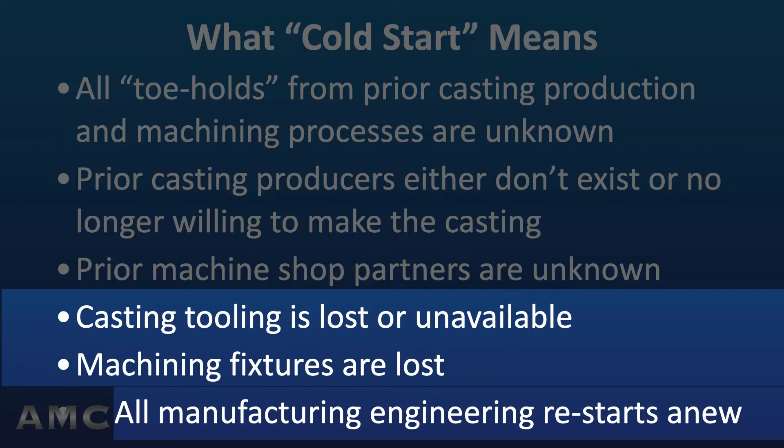To address this steep challenge, our 2022 webinar series is focused on initial thoughtful manufacturing planning before any tooling is designed or manufacturing processes are chosen. This initial thoughtful planning is called project management. The essence of project management is to clearly identify all that is required in the finished casting, understand it, and put all the major steps in a timeline. The idea is to think of everything that matters in advance and not miss anything. The objective is to not back up to fix or redo anything. For complex, high-specification DLA legacy castings, not missing anything and not backing up to redo anything is a tough challenge.

In part one of our four-part webinar series, we addressed a machine shop awardee's logical first question: can we machine this geometry complete from a wrought bar or block of an equivalent alloy, rather than procure a casting and machine a few of the casting's features to net shape?

In part two, we acknowledged that a machine casting is required, and we addressed the project management issues of planning for a casting made in the air-set sand process. For DLA legacy castings, the air-set sand and investment casting processes are the most capable methods to produce the castings. Sometimes either process can be chosen; other times, one is preferable or even required over the other. The reasons for the air-set sand process choice were addressed in part two.

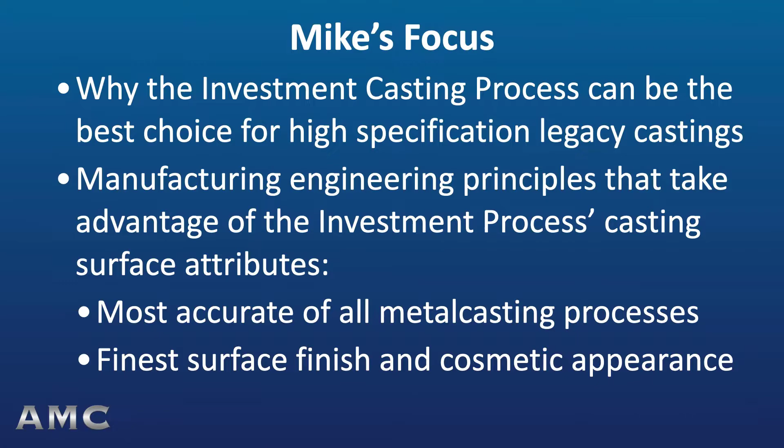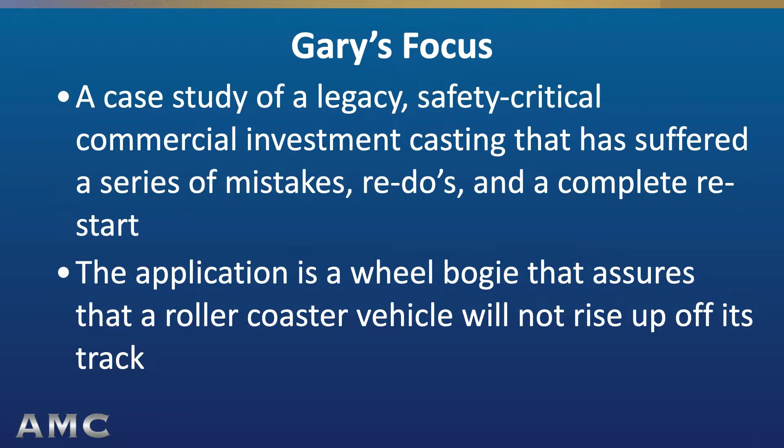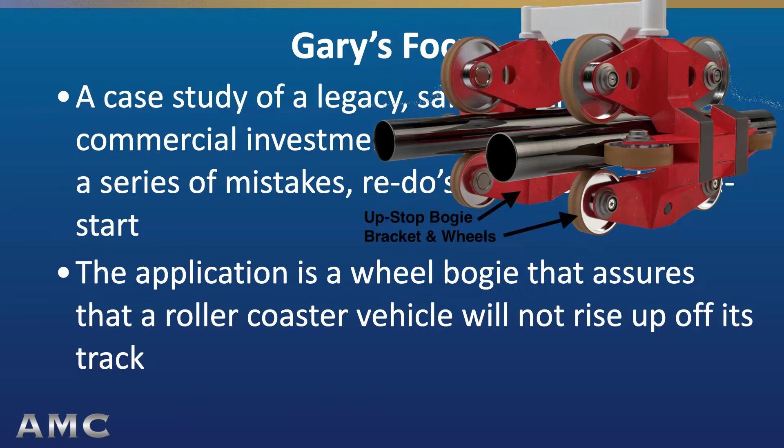Following Mike will be Gary Burrow, our Cast It expert in mold cavity design, which includes tooling design and construction. Gary is also our expert in additive manufacturing alternatives to traditional casting tooling. Gary will use his expertise in both arenas to explain a case study: a high-specification, safety-critical legacy investment casting used as a replacement part in an amusement park roller coaster vehicle. This 10-piece order for a 1970s-era replacement casting has suffered a series of non-conformances and restarts that are typical when a complex casting manufacturing project starts without project management forethought.

But first, here's Mike with a summary of the indications for and capabilities of the investment casting process. The investment casting process is one of the oldest, if not the oldest, of all metal casting processes. Yet it probably is the least understood by casual designers and users of castings.

Let's take a moment to define a couple simple yet interesting facts about the investment casting process. Historically, it was called the lost wax process, which is really a more descriptive name. From its historical beginnings, artisans would carve blocks of wax into shapes that became the pattern for a casting mold.

The mold was made of clay, the type that can be heated to make pottery. When the shell of clay around the wax was heated, the wax melted out or was lost. The earliest lost wax castings were poured in gold and silver. Later, copper was used, which is like gold and silver in that it's naturally occurring as a metal.

Back then, and continuing today, artisans carve wax to make bronze statues and fine jewelry. Here's a video that summarizes the investment casting process as it has advanced in today's technology. The video will stop short of the latest technology, which is printing wax substitutes, wax-like polymers, and even wax itself in 3D printing technologies, forming the pattern shapes directly from solid models.

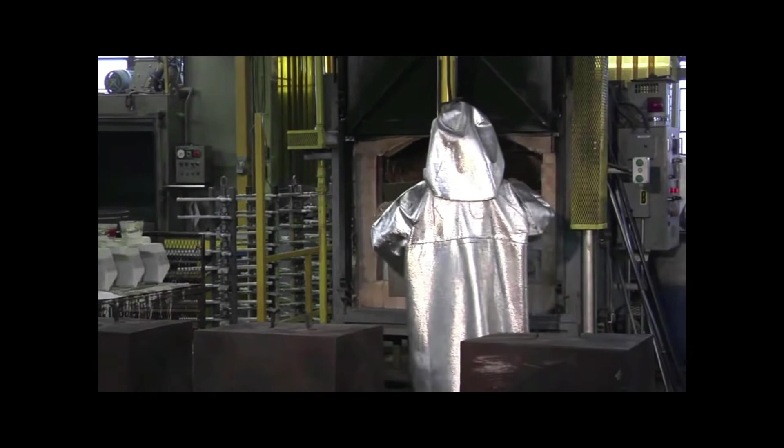When the pre-ceramic shell is dried, it is turned upside down, put in an autoclave, and the wax is melted out. Then the empty mold is put into a furnace where it is turned into a ceramic, and while it is still hot, the castings are poured.

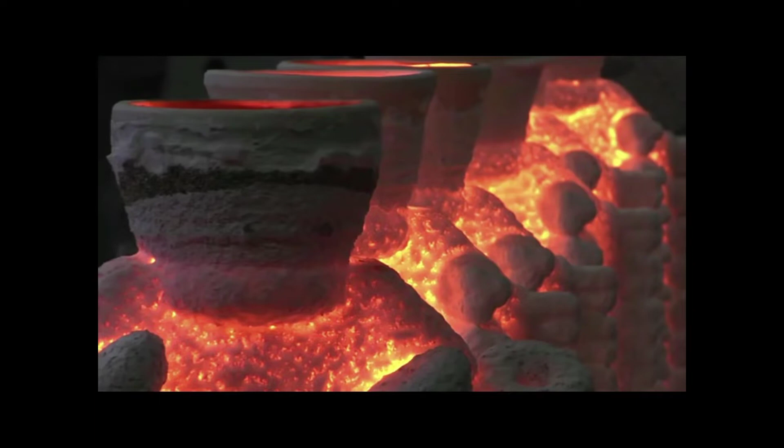One of the great attributes of the investment casting process is fine detail and thin walls, and the hot mold enables that. As we can see, the mold is going to be poured now while it's still hot, so the ladle arrives quickly to take advantage of the pre-existing mold temperature.

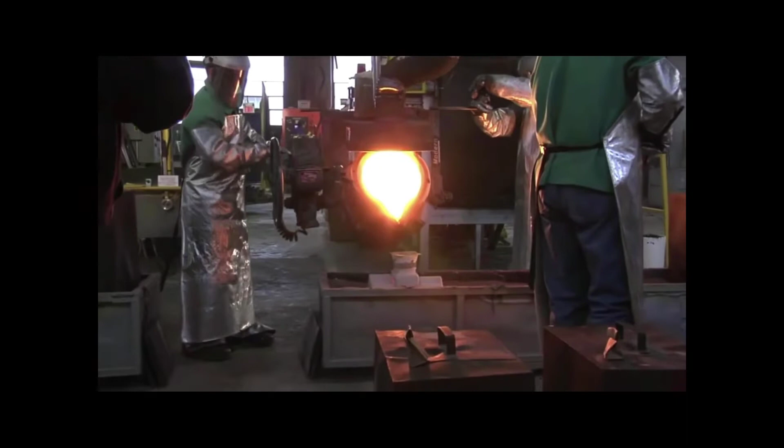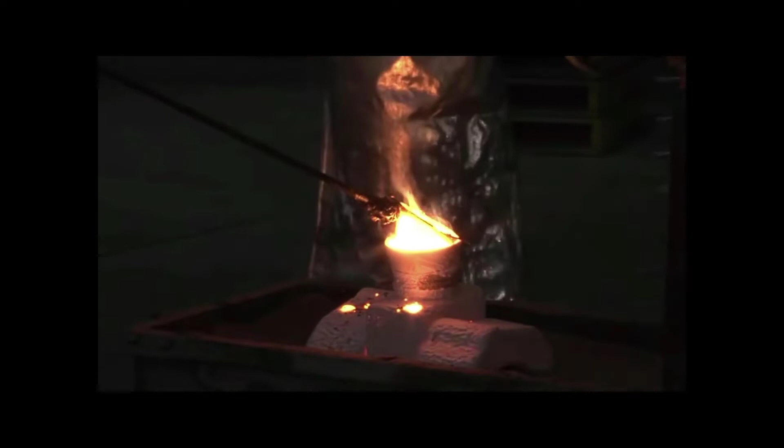You'll see the pouring crew take steps to take advantage of that temperature even after the mold is poured. So we see a filter being removed from the sprue, and you'll see an insulator being applied to one side of the mold geometry and a hood placed over the entire mold. Finally, the shell is broken away from the castings.

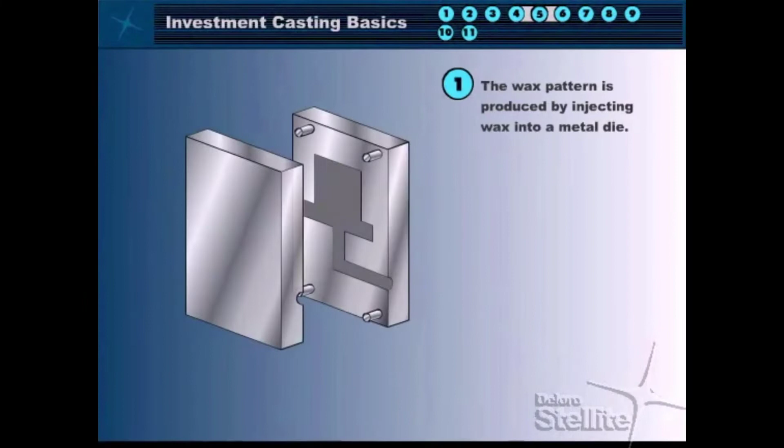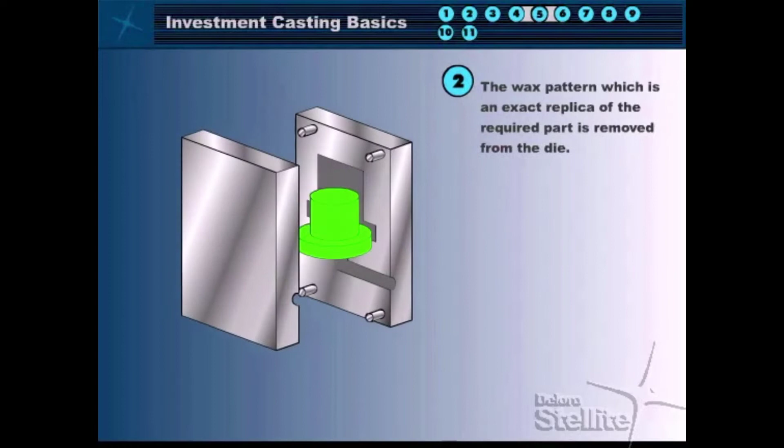Let's take those steps in the ceramic shell investment process and bring them to life with an animation. First, we have that die that creates the wax patterns. Wax is warm and slick, so it will release from the aluminum die with minimum, sometimes no draft.

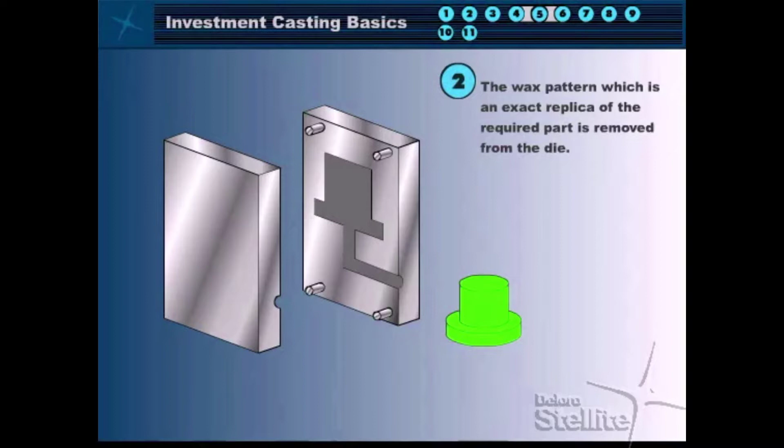However, there is contraction in the wax and ultimately contraction in the alloy when poured. So there are two contraction rates that have to be designed into the tooling, and pattern maker's contraction is a concern in the design of the tooling to make sure that the dimensions, although extremely accurate, are centered within the specified tolerance band.

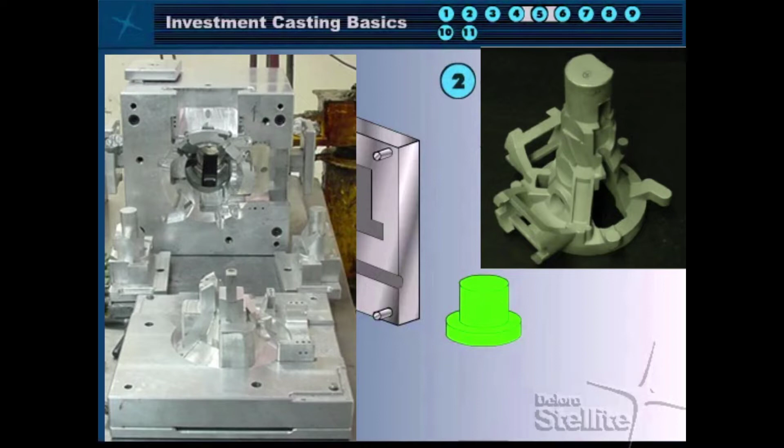In addition to the accuracy of the ceramic shell investment process, the complexity of castings that can be made in the process is very significant. We see here a wax pattern that has many complexities and fine detail in its structure. This inset shows the complexity of the aluminum tooling to make that wax pattern, with an upper and lower half with slide mechanisms coming in from the side to create the cavities in the exterior profile.

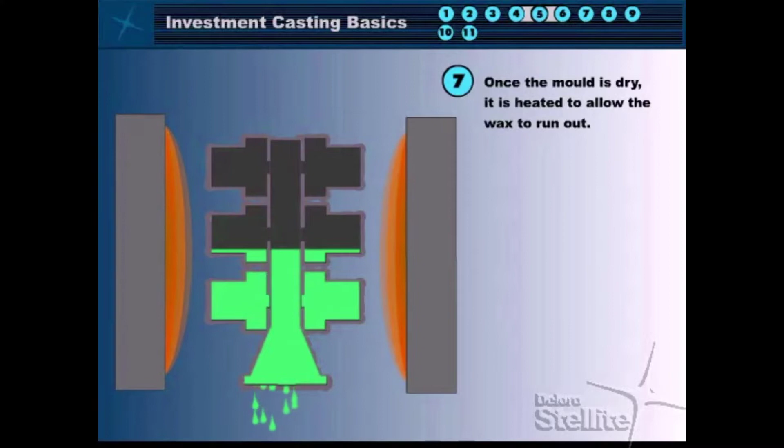After the tree or cluster is thoroughly dried, it is heated, usually in an autoclave, to drain out the wax. The reclaimed wax is used for other trees and vents in the cluster, and new wax is used for the patterns.

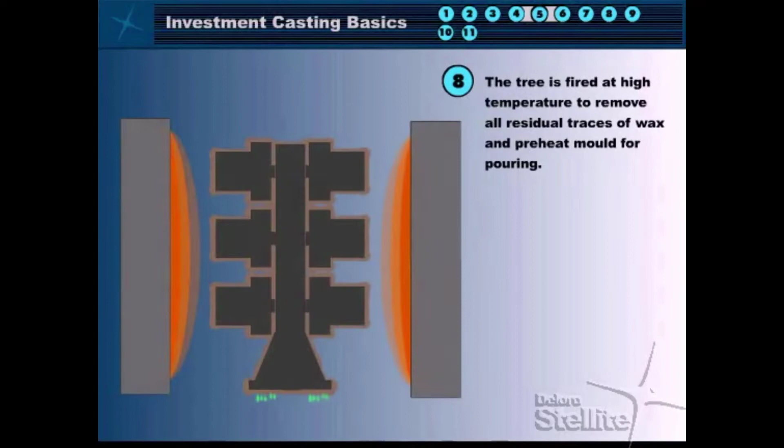Next, the empty tree or cluster is put into a furnace and fired at high temperature to remove all residual traces of wax and turn the pre-ceramic shell into a ceramic. The now ceramic shell is removed from the furnace and poured while the shell is still hot.

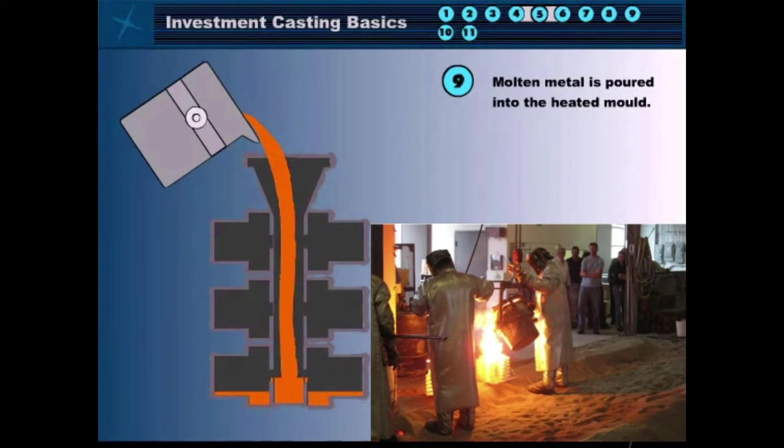Next is Gary's case study, and he will highlight the investment casting capabilities you've just seen applied to a highly specified, dimensionally demanding legacy casting application. In his case study, the importance of project management in those investment casting process capabilities will be the main message.

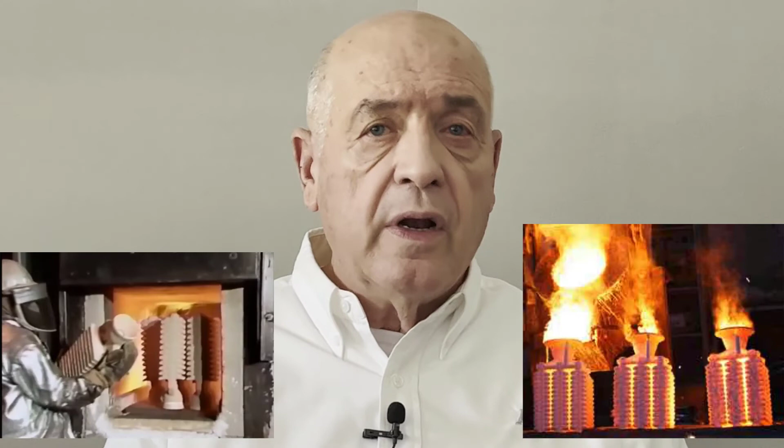One drawback of the investment process mentioned in September's Part 2 AirSet sand casting webinar is achieving high solidification integrity and high mechanical properties in the interior of a hot investment casting mold. The issue of investment casting radiographic integrity comes up in Gary's case study.

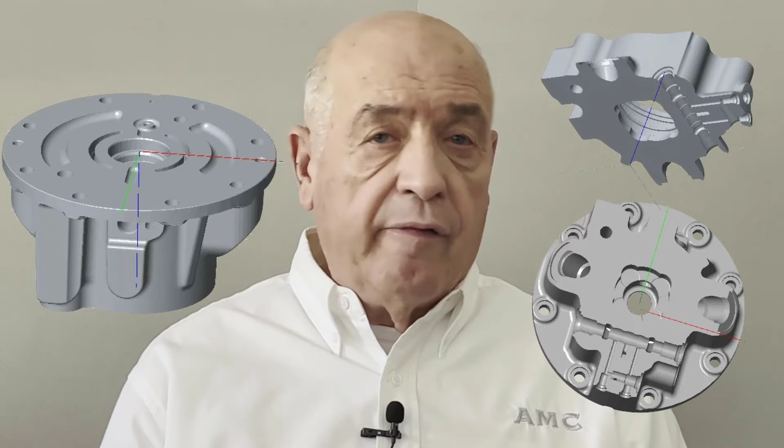Here's the reason. This small flow control valve is made as a casting in plain carbon steel. It's very complex in its interior passageway geometry, so being small and cored extensively, if it were an AirSet casting, it would seem to be an ideal application for the capabilities of investment casting instead. However, there are significant interior regions of the mold geometry that are thick and difficult for carbon steel to solidify with high integrity if not fed for shrinkage and if remaining too hot too long.

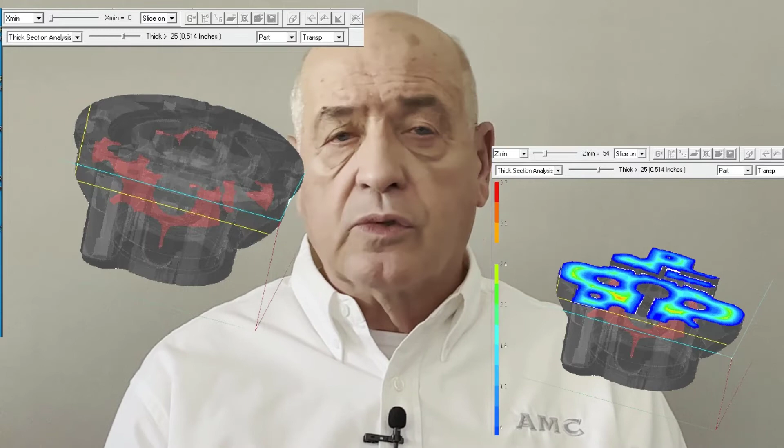The consequence of an investment hot mold might be this casting leaking from one passageway to another inside those thicker, hot interior regions. There are ways around this problem, either by making the casting in AirSet with extensive 3D printed interior mold elements, or by changing the design geometry to feed those hot interior regions in the investment casting process. Those are the kinds of project management forethinking that is our webinar series subject. You will see the need for that project management thinking in Gary's case study.

Thanks, Mike. Now that we've seen how capable the investment casting process is, let's look at an interesting case study that illustrates how important immediate project management thinking is when producing a high specification casting. High specification legacy castings are not unique to the U.S. defense weapon systems. This case study involves a replacement part casting for a nationally known amusement park's roller coaster.

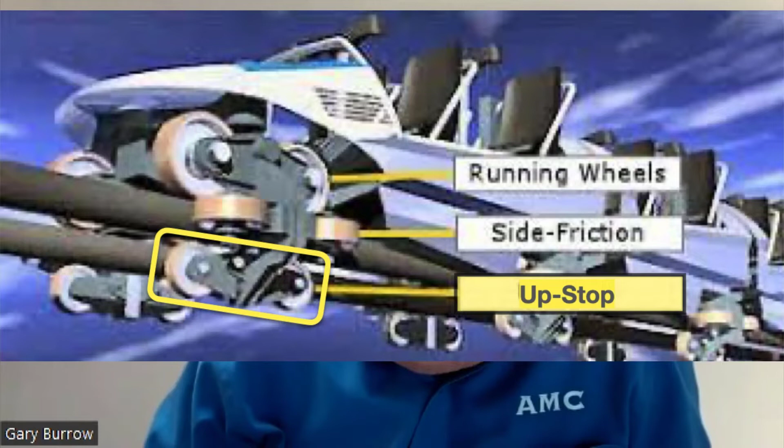Originally produced in the early 70s, this casting performs a high safety critical role in holding the coaster's vehicle wheels to the track when the G-forces are vertical. Our example is the set of wheels on the bottom of the track called an upstop, which is what the wheels do. Our case study casting is the bracket called a bogie that holds the upstop wheels against the bottom of the track rails, left side and right side.

The combination of thin walls, tight dimensional tolerances, challenging solidification integrity, and critical safety service makes this legacy commercial bogie bracket very much like a DLA legacy airframe casting.

Amazingly, as of October 22, 10 legacy bogie upstop castings are about to be delivered to the amusement park after 1,250 working days over the course of 4 years and 10 months.

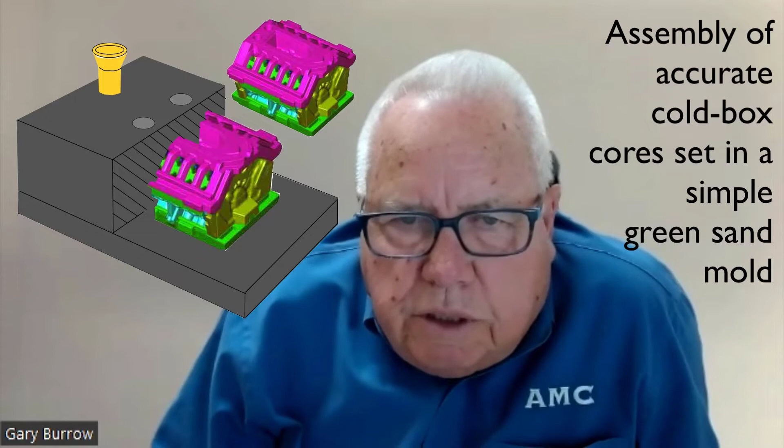The original quantity of 120 castings for the coaster system were produced as sand castings. The castings were made in green sand molds with all of the important thin wall and important as-cast dimensions formed with cold box cores in a complex core assembly, resting in a simple green sand mold cavity. Here's an image of what this type of mold looked like back in the day.

This sand mold technology of years past could not have met the plus or minus 0.030 drawing tolerances on as-cast features required in the drawing. So the original engineering authority would have redlined the bogie bracket drawing to allow wider tolerances where the function of the bracket or its strength would not be affected, fit to air surfaces.

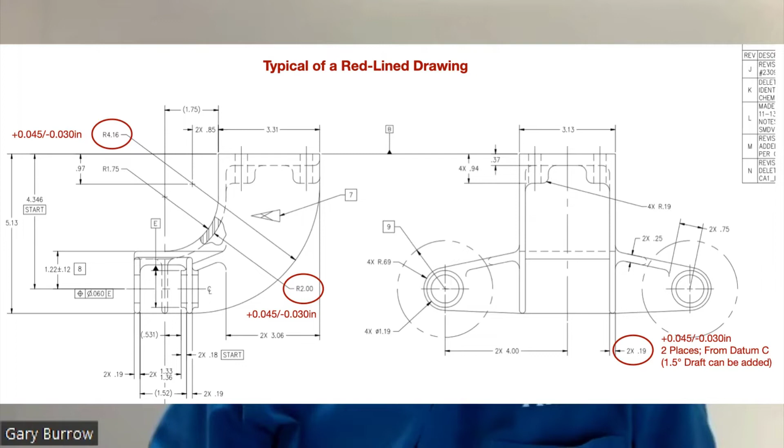But as is typical, those redline exceptions never get documented. The drawing tolerances remain the same. Although there have been no failures among the original 120 ductile iron castings over the 50 years, worldwide amusement park safety concerns have caused this ride's engineering authorities to tighten the casting specifications.

Here are the major requirement increases that have resulted in more manufacturing difficulty. The Class 1 stamp on the drawing specified to the amusement park's internal specifications, and it conveys the overall message of stringent dimensional tolerance compliance and stringent solidification integrity. Certified radiographic testing is required.

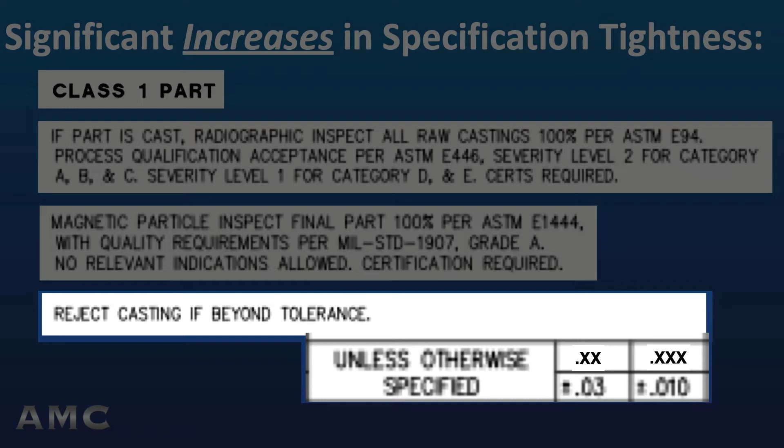Solidification shrinkage must meet or exceed Class 2, which is difficult but doable. Cracks and hot tears must not be detected at all. Further protection against cracks or hot tears is magnetic particle inspection of the entire finished machine part. No relevant indications allowed. As-cast and machine tolerances remain unchanged, and the possibility of exceptions has been precluded by the no-reject-casting-beyond-tolerance policy.

The first step in what would have been a project management plan for the 10 replacement bogey brackets was actually well thought out. The machine complete option using a wrought or forged bar is not practical for such a thin 3D design machined from stiff steel.

The bar to encompass the bogey geometry would weigh 173 pounds to result in a 7-pound net shape. That means 96% of the bar would wind up in chips.

Also costly would be a series of very light machining cuts followed by stress relief heat treatment after each cut. Relieving the machining residual stresses is necessary to keep the thin walls straight. If the walls are not kept straight, subsequent cuts would make the walls too thin, causing the part to be scrapped.

The original cast ductile iron specification is obsolete, so the chosen investment caster requested an engineering change to allow 8625 low alloy steel to be substituted. 8625 was also chosen as economical to melt and resistant to hot tears.

The basis for choosing the investment casting process is summarized in the table. For the bogey brackets overall, with no exceptions, plus or minus 30 thousandths of an inch as-cast dimensional tolerance, the air set sand process would not be capable.

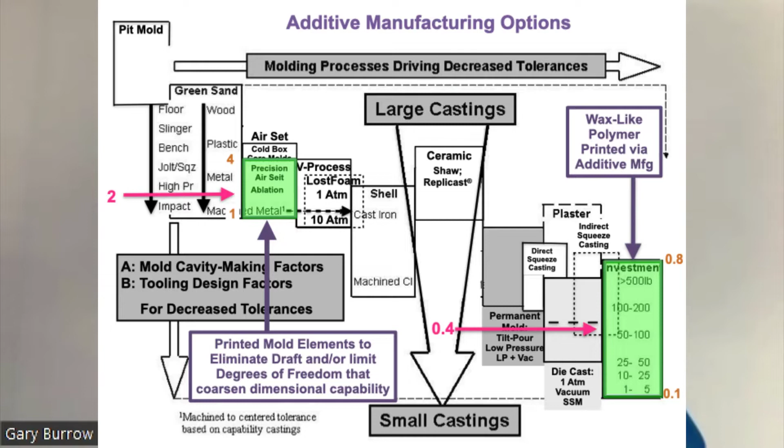The red arrow indicates the situation with the best possible tolerance being plus or minus 2 millimeters, which is plus or minus 80 thousandths of an inch. That's well beyond the allowable tolerance.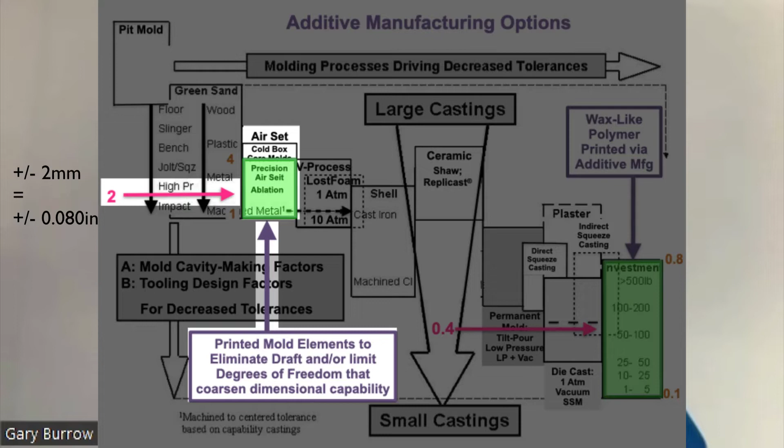The investment casting process has more than enough dimensional tolerance capability. The red arrow shows the consequence of thin wall straightness issues. The tolerance capability has been coarsened to plus or minus 0.4 of a millimeter. Converted, that is plus or minus 16 thousandths of an inch, still very good tolerance capability compared to the required plus or minus 30 thousandths of an inch.

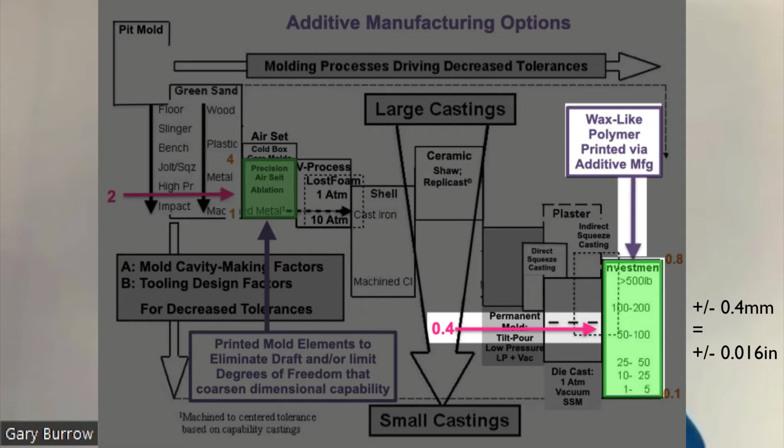So to wrap up, let's look at what was not anticipated as it should have been by the two investment casting sources. In other words, what were the causes of delays and restarts from lack of careful forethought.

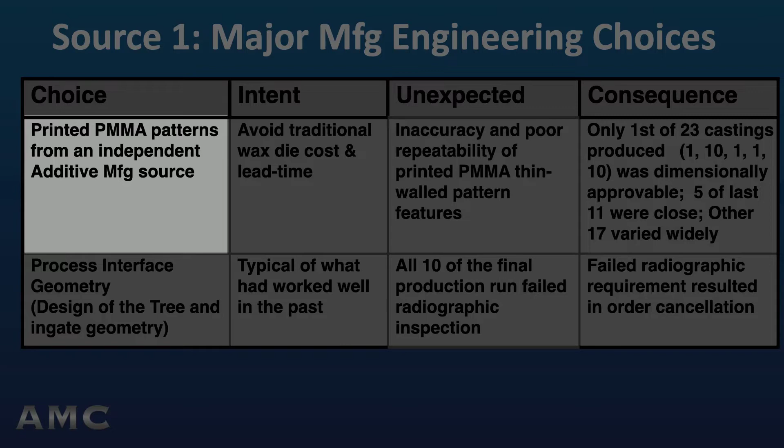Here is a table of initial manufacturing engineering and manufacturing process choices and their problematic consequences. Printed PMMA patterns for the investment process is a common and worthy technology. However, the process is based on spraying a binder onto the wax-like PMMA polymer in the form of a powder bed. Normally, the powder bed supports hollow features and overhangs as they are being formed layer by layer.

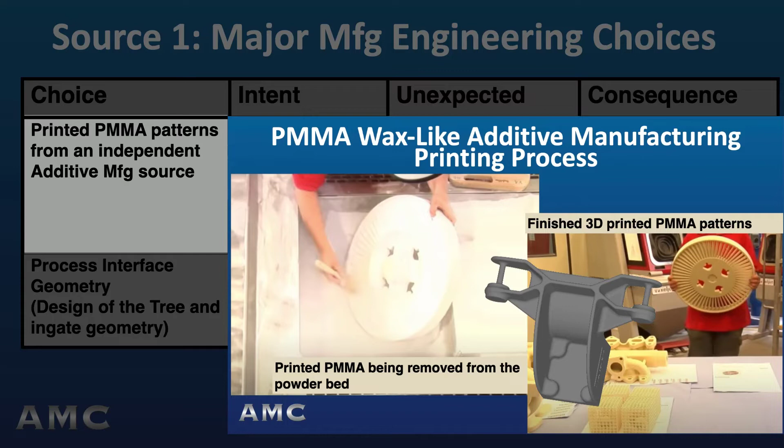However, for very thin wall overhangs, the powder bed isn't sufficiently stiff to keep the thin overhangs straight. So among all of the PMMA patterns that were printed in attempts to make dimensionally acceptable castings, the printed patterns themselves varied widely in straightness.

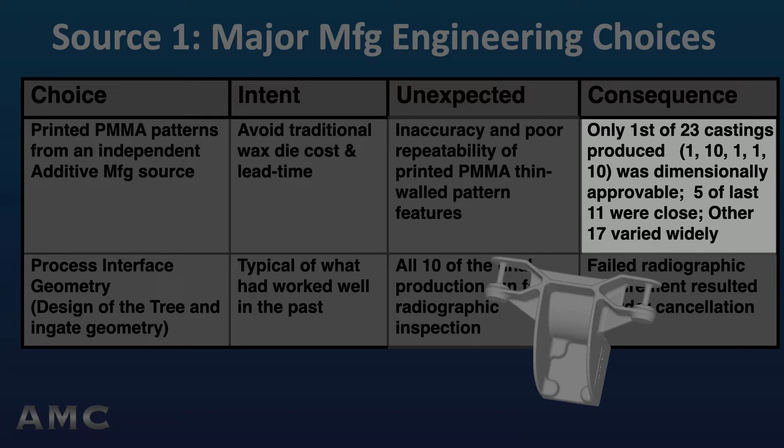A capability study should have been conducted to determine the accuracy of PMMA binder jet printing at the onset. As we will see, a different, more dimensionally capable 3D printing process could have been chosen.

At the time, the better choice would have been to build a traditional machined aluminum wax die and use traditional wax patterns. Here is the setup for pouring the bogey bracket castings and solidifying them to high integrity specification. Alongside is a 3D image of the interior thickness of the bogey casting bracket.

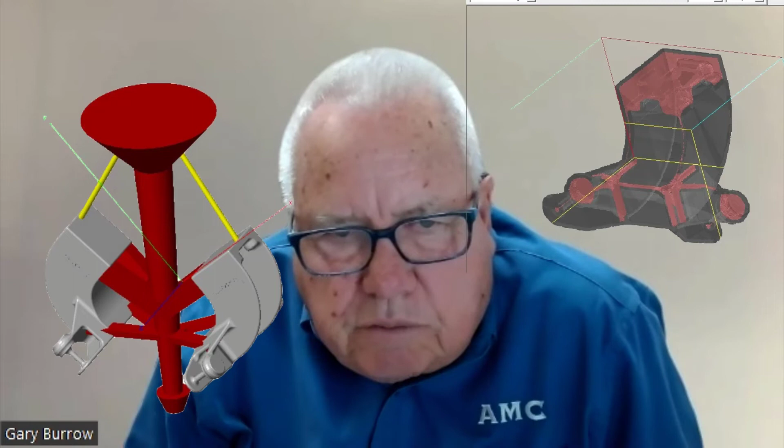The red thick areas shown in 3D are regions where solidification integrity would likely be a problem. That concern has to be dealt with in the decision in the design of the tree and the wax pattern connections.

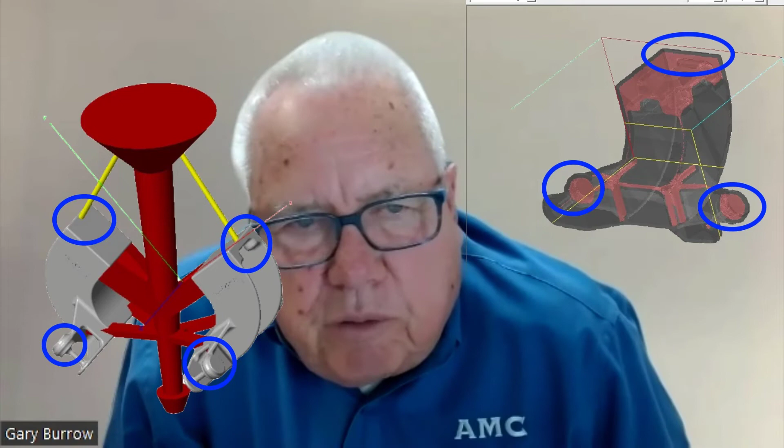Based on this mold setup, none of the prototypes nor 2 production runs of 10 castings passed the radiographic requirement. After the cancellation of the purchase order to the first investment casting source, a second source was launched in October of 2019.

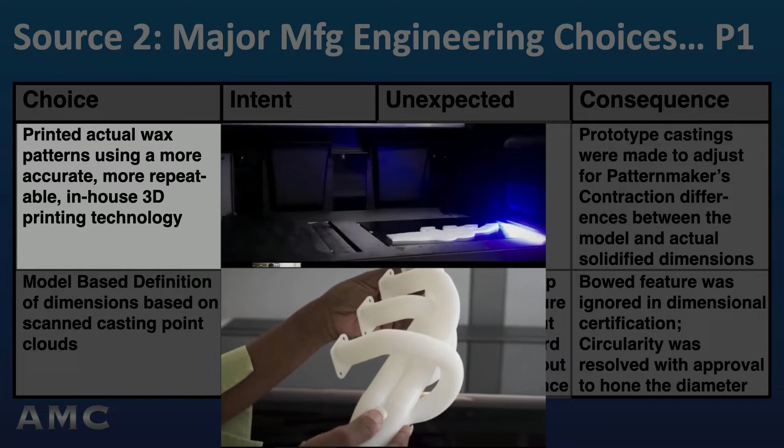This second source has an in-house 3D printing machine capable in multiple materials, including actual wax. Included in the available printing materials is a support material that enables support structures to be built immediately under the thin wall geometry overhangs, so the machine can automatically alternate between wax pattern and support structure as the print head traverses in the X and Y direction.

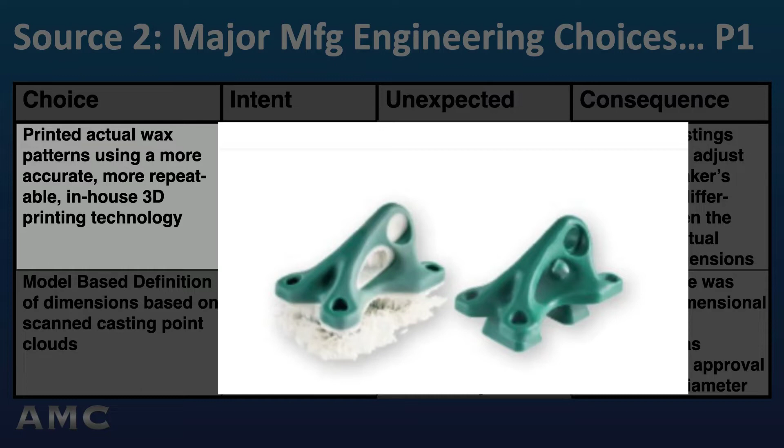This second source did what we have prescribed in our entire webinar 2021 and 2022 series. They made a prototype casting from 3 iterations of 3D printed wax patterns. Using those prototypes, adjustments were made to the solid model to correct pattern maker's contraction on a 3D basis and solidification movement of the thin walls.

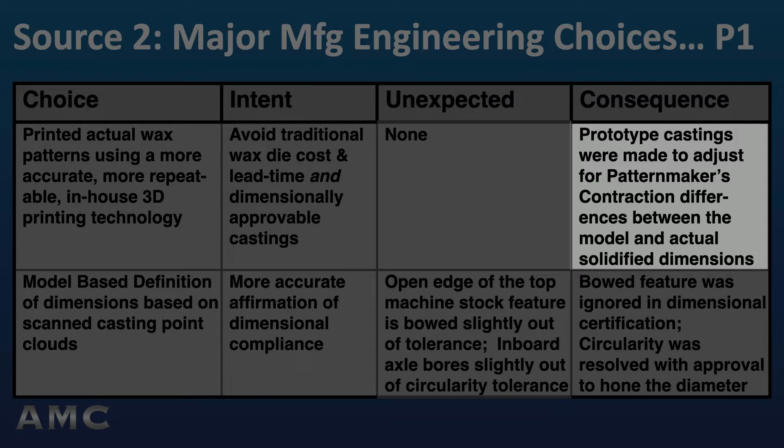A second production run of 10 castings resulted in certified dimensions. Dimensions were certified on the basis of model-based definition image of the solid model and a scan point cloud of the actual castings, one by one.

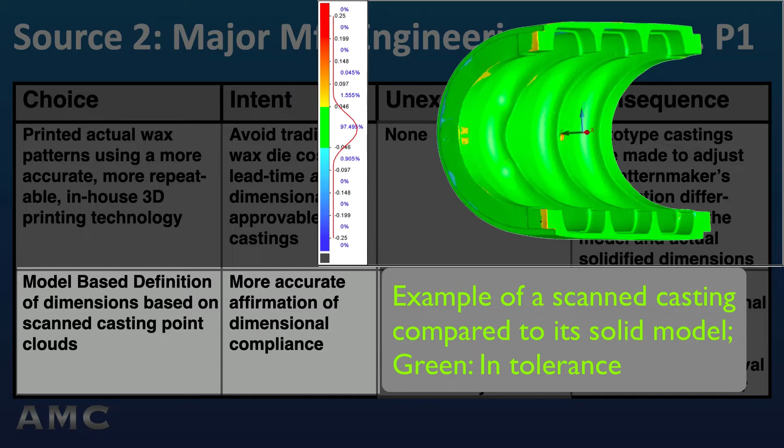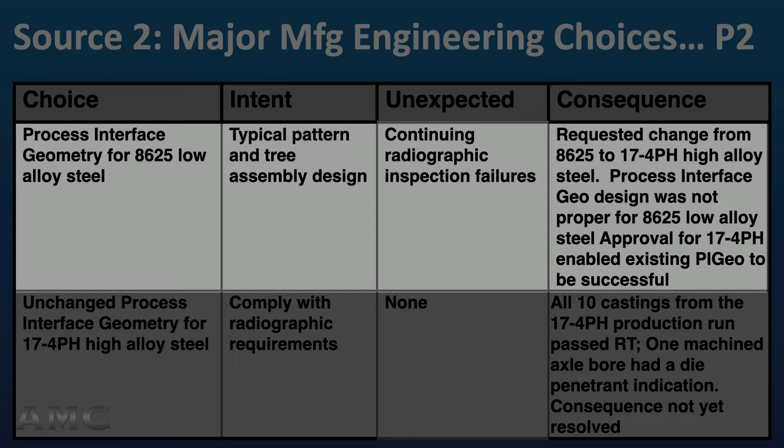The request for alloy change from 8625 low alloy steel to 17-4PH high alloy steel is a consequence typical of investment casting producers. Unlike air-set sand castings producers who are familiar with temperatures and mass gradients necessary to set up high solidification integrity, the hot investment casting mold reduces the temperature gradients.

Many of the alloys common to investment castings are not as sensitive to the mass gradients and directional solidification geometry as 8625 low alloy steel is. So the request to change from 8625 low alloy steel to 17-4PH high alloy steel was unnecessary had the tree geometry been better conceived.

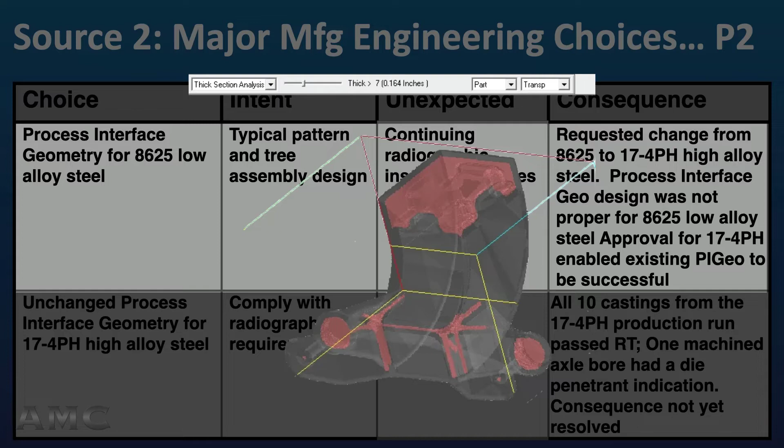However, the change made the existing mold setup for integrity more familiar to the investment caster, and it was successful in meeting the radiographic requirements.

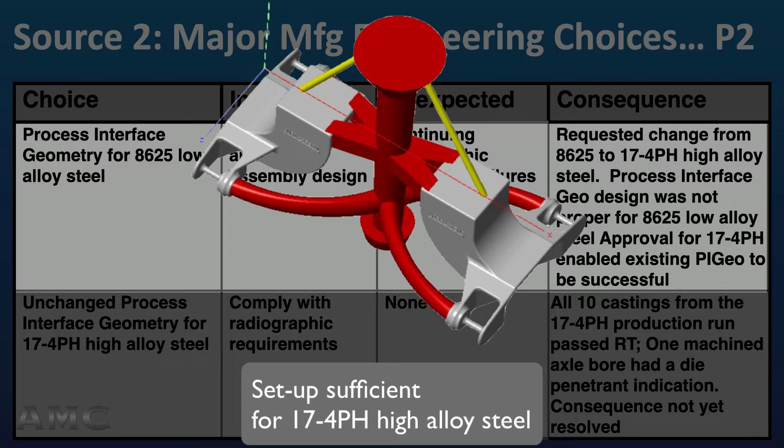To conclude, if you are a machine shop, cold start, new awardee for a similarly difficult DLA aviation legacy casting, you may be asking, how am I going to know all this stuff that's specific to the investment casting process, additive manufacturing, and alloy solidification differences? The answer is you won't.

However, the benefit of project management thinking for a machine shop new awardee is the questions that need to be asked among the manufacturing partners to avoid oversights. The questions need to be hard ones, and the answers can't be accepted if they are fuzzy.

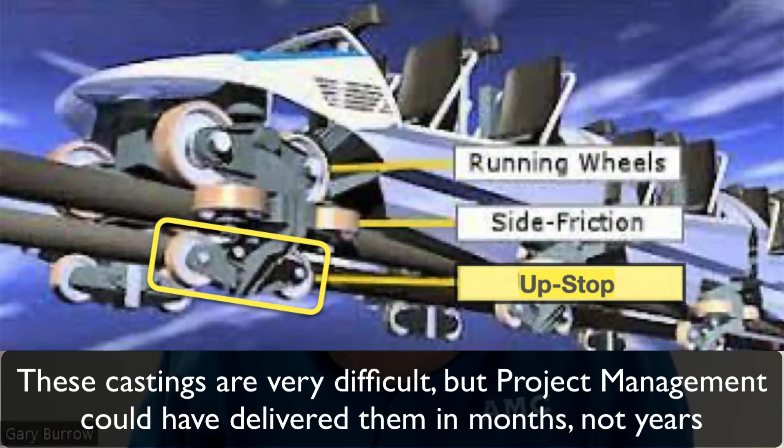As the case study has illustrated, there were no reasons that the 10 certifiable bogie castings should take longer than a few months, even as difficult as the requirements are. 4 and 3/4 years are the consequence of not thinking the manufacturing engineering and the manufacturing process through at the onset. The 4 and 3/4 years have been the consequence of mistakes and restarts.

As Gary and Mike have shown us, the investment casting process is very interesting in all of its facets, from making sculptures and fine jewelry to safety-critical jet engine turbine blades. Its capability to make dimensionally accurate surfaces with a fine surface finish and detailed cosmetics is unsurpassed among all of the metal casting processes. Implementing those capabilities is complex at the highest levels of component specifications, so project management at the very outset of manufacturing choices is necessary for success without mistakes and costly restarts.

Those manufacturing choices include how to make patterns to be invested in the ceramic shell. Should it be traditional machined aluminum dies into which the liquid wax is injected? Or should we use 3D printed wax equivalent patterns directly from a version of the design's solid model? If 3D printed, will the 3D printing process be dimensionally stable enough to make dimensionally capable castings?

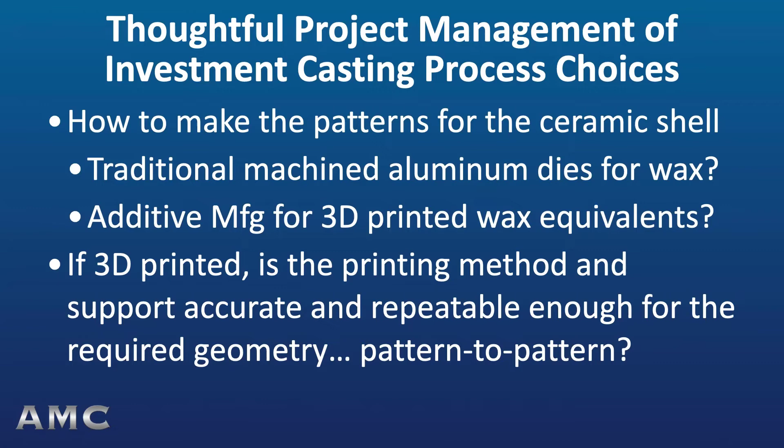If high stress areas reside in the interior of the casting geometry and designated areas for higher mechanical properties are specified in those locations, will the hot investment shell mold cool those locations quickly enough to meet the required mechanical properties? If not, the air-set sand process may be required instead.

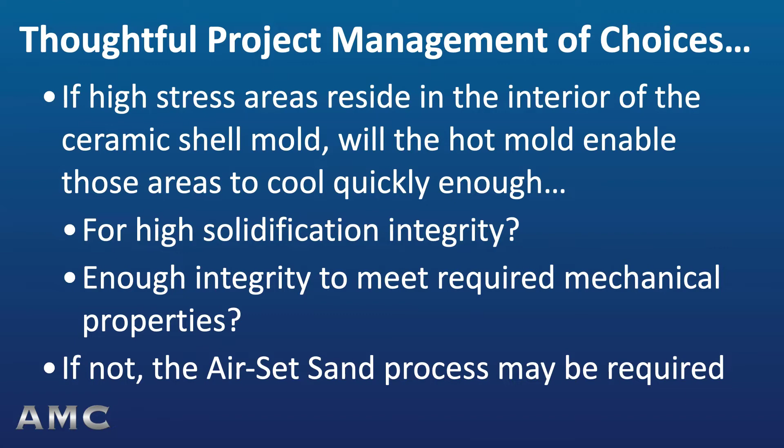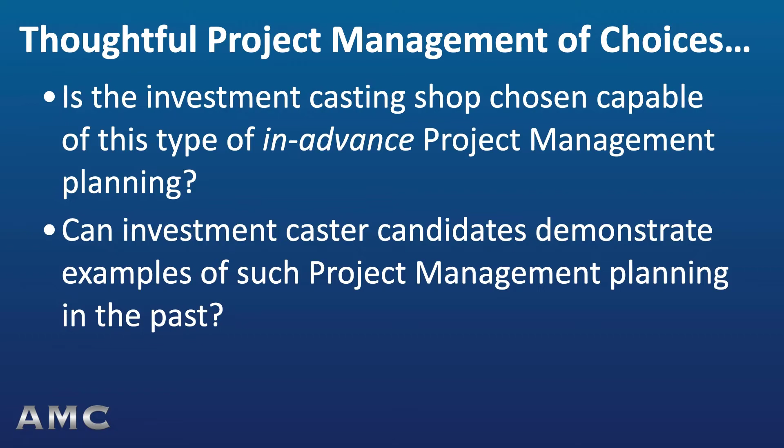Is the investment caster chosen capable of advanced project management planning? Is there evidence that the investment caster has made these kinds of plans in the past? If those choices can be made affirmatively, then the investment casting process is a great choice for high specification castings, including castings for DLA legacy weapon systems.

Our final part 4 of this project management walkthrough of machining and casting process choices addresses the casting finishing processes common to both the air-set sand and investment castings. Finishing processes are where the casting's dimensional capability and consistency for machining setups can either be sustained or upset. It is an important subject that's not often addressed, and it needs to be addressed in the same advanced project management planning as the choices of the casting process and tooling design and construction.